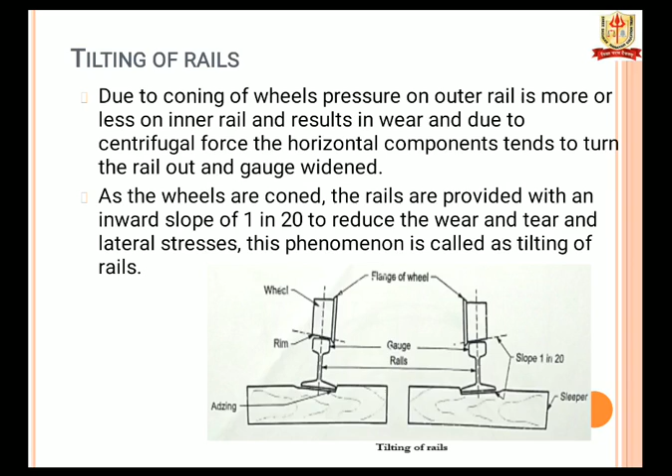This phenomenon is called tilting of rail. Tilting of rail is achieved by providing a cut in the wooden sleeper called adzing, and canted bearing plates can also be used in wooden sleepers to provide tilting of rail. Steel and CI sleepers have an inbuilt slope on the bearing surface to provide tilting of rail.

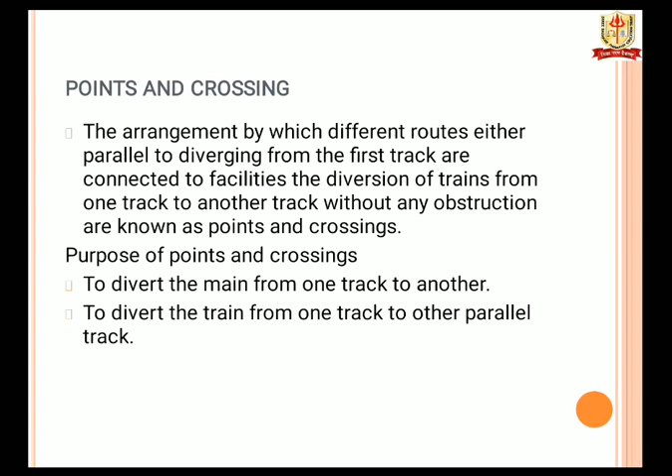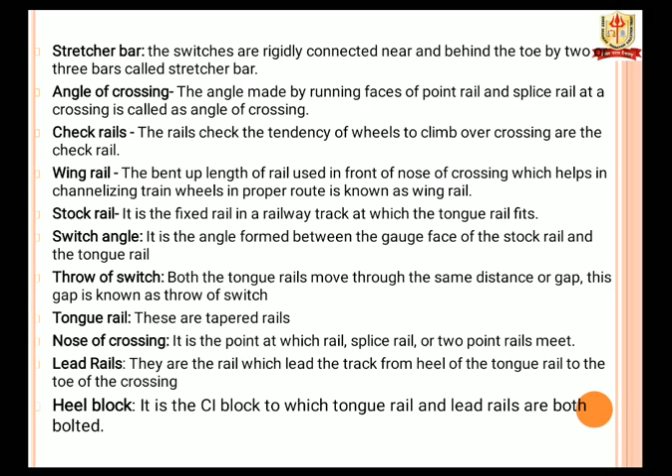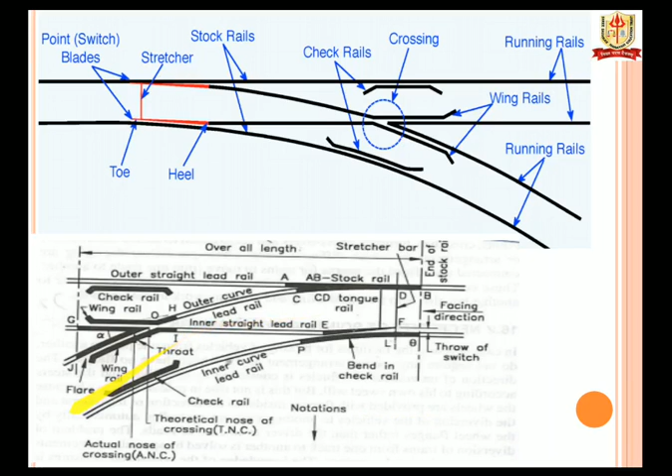Lead rail. They are the rails which lead the track from the heel of the tongue rail to the toe of crossing, called lead rail. And heel block. It is a CI block to which tongue rails and lead rails are both bolted. So this is your lead rail, and this is your heel block.

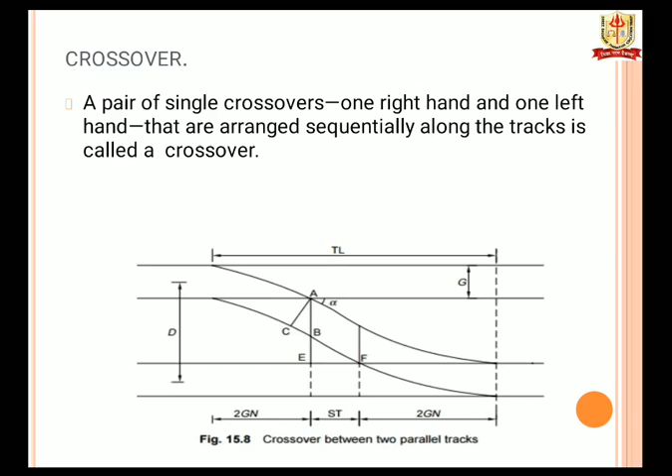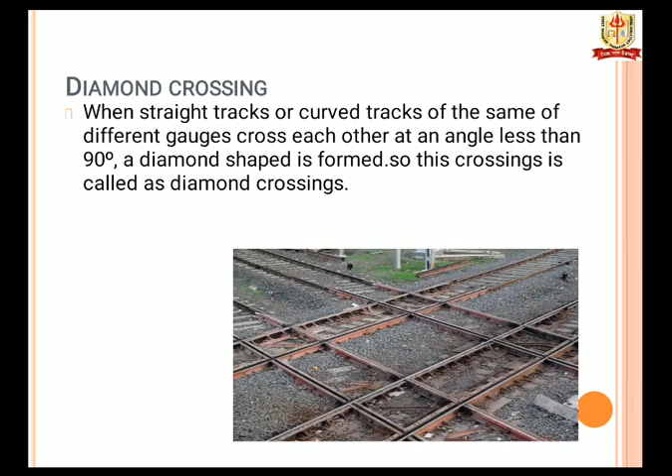Next is crossover. A pair of single crossovers, one right hand and one left hand, that are arranged sequentially along the tracks is called a crossover. Diamond crossing. When straight or curved tracks of the same or different gauges cross each other at an angle less than 90 degrees, a diamond shape is formed. So this crossing is called a diamond crossing.

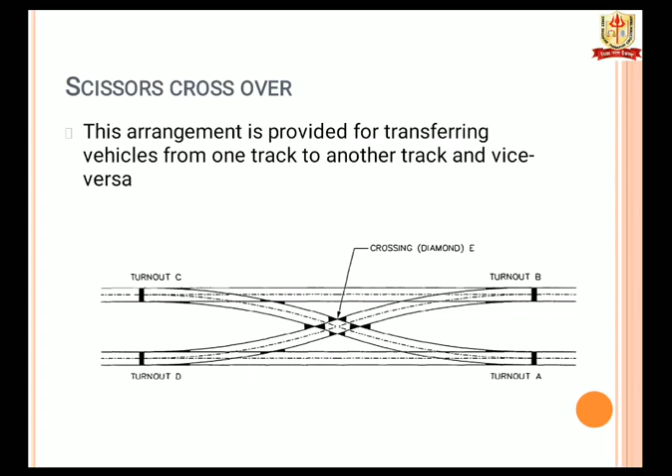Scissors crossover. This arrangement is provided for transferring vehicles from one track to another track and vice versa. It consists of 4 pairs of points and 6 acute angle crossings. The arrangement is useful where enough space for a separate crossover is not available. Initial cost is high and it requires careful maintenance.

Triangle. The triangle is required for changing the direction of the engine. It consists of 2 simple turnouts and 1 symmetrical split. The concept of changing the direction of the engine was relevant in the case of steam locomotives and is not applicable to electric and diesel locomotives, which can be operated conveniently from both sides. With the phasing out of steam locomotives on Indian Railways, the triangle is mostly redundant.

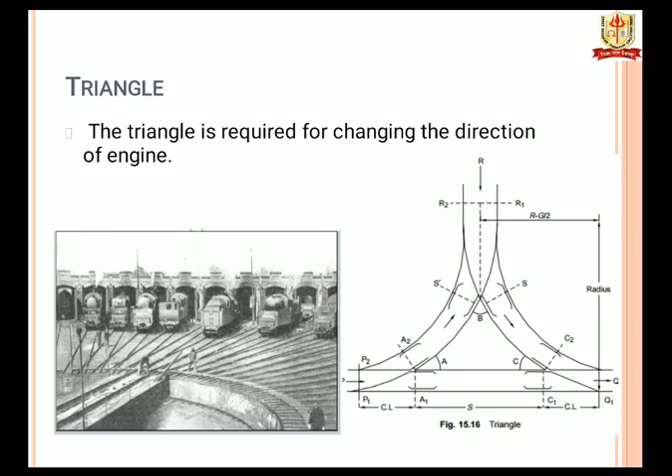To change the direction, the engine is standing at P. It is then first taken to R, then to Q, and then back to P. By following these movements, the direction of the engine gets changed.

Station and yard. The selected places on the railway tracks where trains are stopped for exchange of passengers and goods, control of train movement, etc., are known as stations. We observe daily that trains running on a railway track are stopped at selected places for exchange of passengers and goods, taking fuel for engines, changing running staff, attaching wagons, control of train movement, etc. Such a place is known as a railway station and is generally located where a reasonable volume of passengers and goods is expected to be exchanged.

On either side of a railway station, some space is reserved where a number of railway tracks are laid, which are connected to the main track by means of crossovers and turnouts. This system of tracks, known as a station yard, is laid within prescribed limits for various purposes such as sorting, storing, and dispatching vehicles and making up trains. Factors affecting site selection: the railway station should be close to the towns or villages to be served, should have good approach roads connecting the nearby towns or villages, and should provide good drainage facilities.

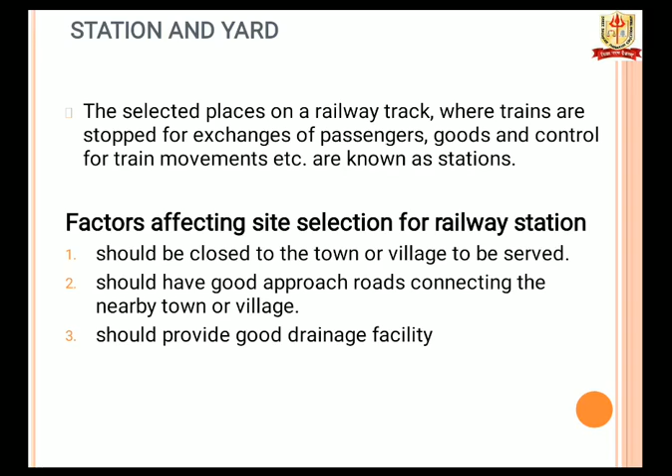Requirements of the railway station. First is public requirement. In public requirements, the following facilities are required: a booking office for issuing tickets to passengers, arrangement for booking of goods, passenger and goods platforms with and without sheds, name boards, waiting rooms, a retiring room, proper arrangement for drinking water, bathrooms, sanitary facilities, suitable lighting during the night, an inquiry office, big boards for the schedule of trains, microphones to announce arrival and departure of trains, and other facilities like a public telephone, refreshment stall, telegraph office, etc.

Next is traffic staff and police requirement. Here we require staff rooms, retiring rooms or restrooms, residential quarters for staff such as station masters, ticket collectors, night operators, engine drivers, etc., and police also. Train requirements. The station should provide the following facilities for controlling the movement and handling of trains. First is arrangement for controlling the movement of trains by means of signals. Sufficient number of sidings for receiving, sorting, storing, and dispatching trains. Sufficient number of platforms for handling passenger and goods trains. Arrangement for controlling and recording train movements.

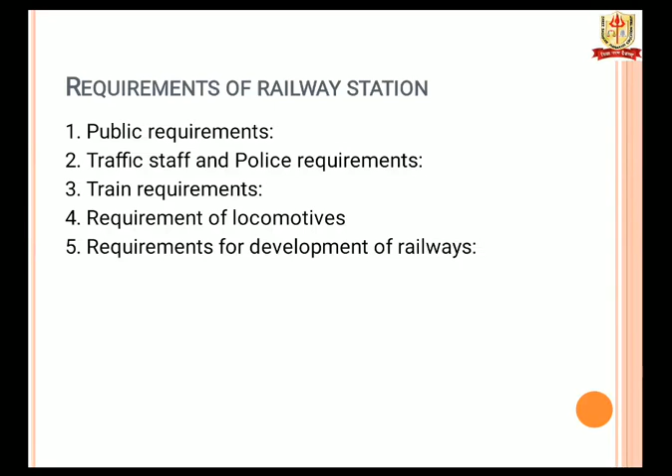Requirements for development of railways. The station should provide the following facilities for proper development of railways. First is easy and comfortable approach roads connecting the nearby towns or villages to the station without causing congestion. Availability of coolies on station platforms. Clocks to show correct time, a guide map of the city. Separate boards for arrival and departure of trains with the platform number. Facilities like escalators, restaurants, big waiting halls, cinema halls, etc.